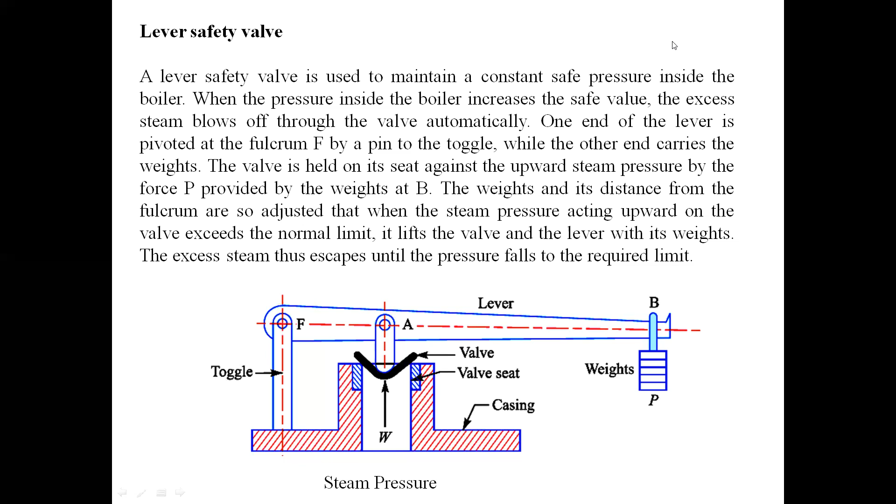Now here we are interested in the lever. The lever has three important points. At A, there is a load W. At B, there is a counter effort P. And at F, there is a fulcrum point. So, one simple statement of the problem.

A lever safety valve is 70 mm in diameter, and it is to be designed for the boiler blow off pressure of 1 Newton per mm square gauge. There is a safety valve having 70 mm diameter, designed for boiler blow off pressure of 1 Newton per mm square. That means if the pressure inside the boiler goes beyond 1 Newton per mm square, the valve is expected to get lifted off and there is a blow off of the steam. Design a suitable mild steel lever of cross section B equal to 4t using the following permissible stresses.

Tensile stress 70 megapascal, shear stress 50 megapascal, bearing pressure intensity of 25 Newton per mm square is given. The pin is also made from mild steel, and the distance from fulcrum to the weight of the lever is 880 mm, and the distance from the fulcrum pin to the pin connected to the valve is 80 mm.

By understanding all this, it is well understood from the figure. In this figure, it is given that there is a pressure of 1 Newton per mm square inside the valve. So on the valve seat, there is a pressure of 1 Newton per mm square, with valve diameter as 70 mm.

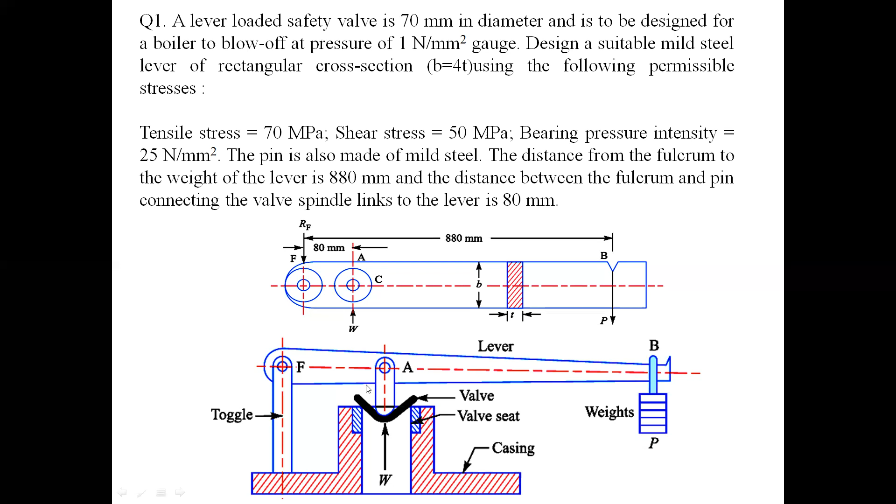Let's look at the given data. There is a diameter D of the valve given. There is a pressure P, steam pressure of 1 Newton per mm square. There are available stresses given, and the stresses are...

Now, looking at the bottom side of our figure, there is a pressure P acting on that diameter D. Because of that, W is created. That means pressure P is equal to load upon area of this valve. So it's a pressure, that's why pressure equals force upon area.

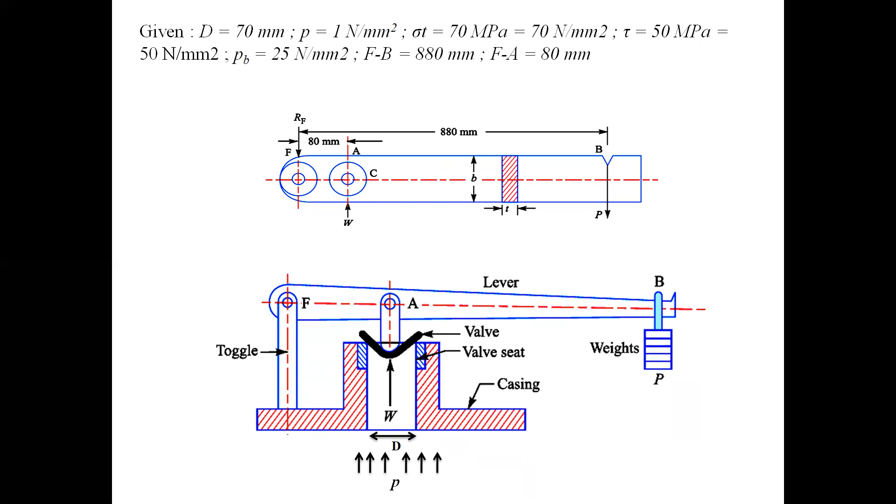Force is here, W, and diameter D. Pi by 4 capital D square is the area. So from that we can get the value of W. Try to get that.

Now here, W is the load and P is the pressure. Our pressure is equal to force divided by area. So W is equal to pi by 4 D square into P, which gives the amount of load at the point of application of W.

So W is equal to pi by 4 into 70 square, where 70 is the given diameter and 1 is the pressure. So 3850 Newton is the load acting at W.

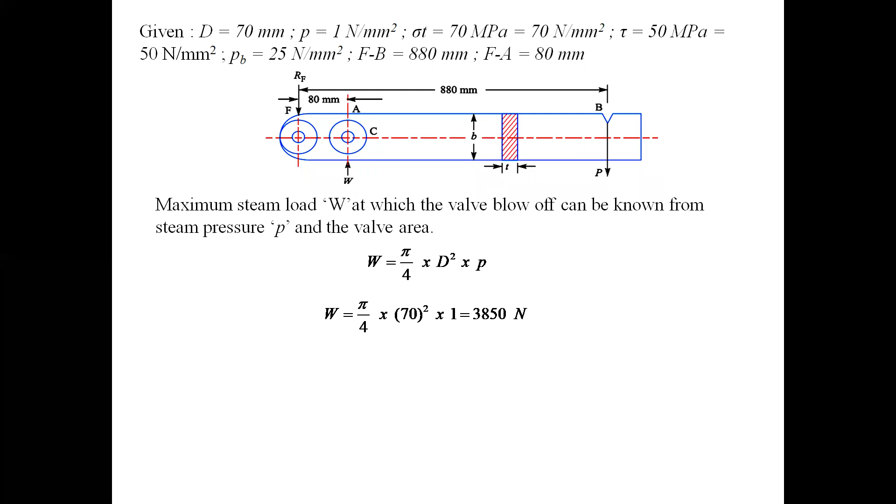The reaction at the fulcrum point we can find. When we take the reaction at the fulcrum point, we can get the moment created at the fulcrum point. So take moment about the fulcrum point so that we can have the equation between effort and load.

If I take reaction at the fulcrum point, P is the effort multiplied by 880, the distance from the fulcrum point, which creates clockwise moment, whereas W, which is in the upward direction at W, creates anti-clockwise moment. W we know is 3850, which we just found out.

Multiply by 80. So it becomes P equal to 308 into 10 power 3 newtons, divided by 880. Then P equals 350 newtons.

So P, the effort at a distance of 880 from the fulcrum point, is just 350. Now you can see the W load is very high, 3850 Newton, whereas the effort required is very less. So to control the pressure inside that boiler, we need very less force compared to the load created because of the steam. That is the main application of our lever.

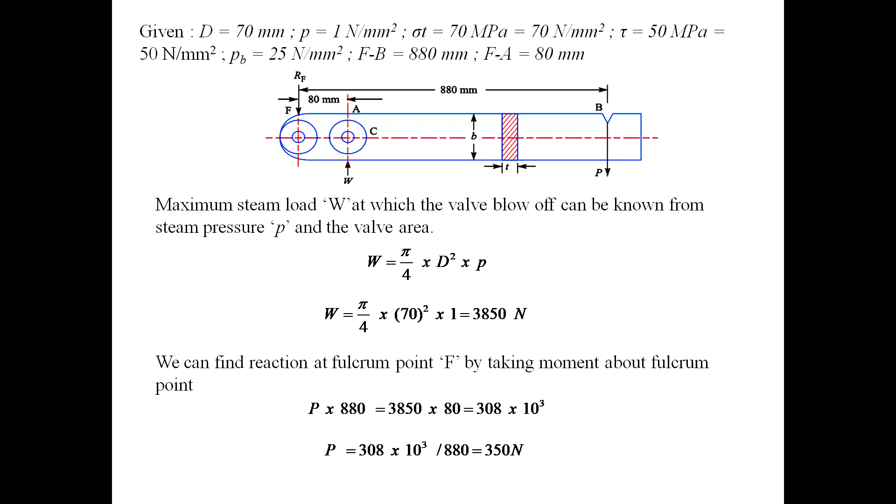Because of the lever, we can control the steam pressure using a very small quantity of force. So these are our values of forces at W and at P. These forces obviously we are using for the design.

Now, what is the reaction at the fulcrum point? The reaction at the fulcrum point we can find because there is W, which is load in the upward direction, and P, which is load in the downward direction. That's why the reaction at the fulcrum point is simply the subtraction of these two: 3850 minus 350. So 3500 Newton is the downward reaction at RF.

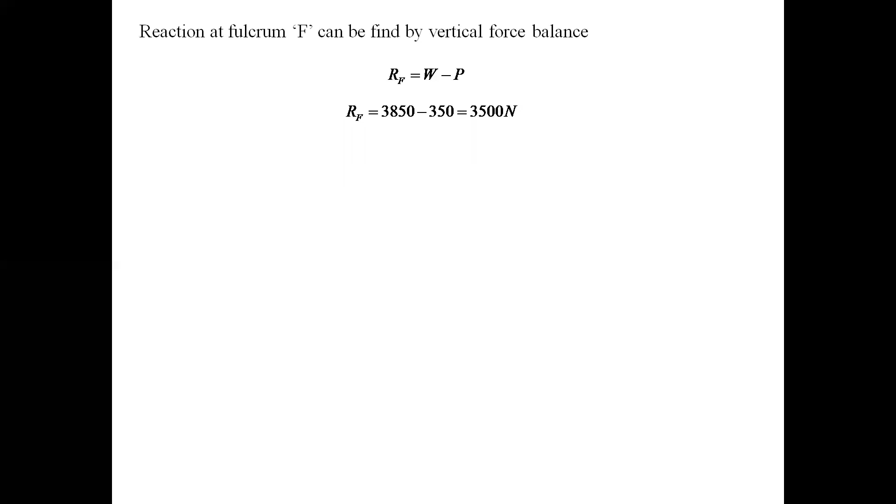Now let us go one by one through the pin design and the lever cross section. For that, first we'll go for the pin design. So there is a pin at A and there is a pin at the fulcrum point.

The pin at A has more diameter due to more force, which is equal to 3850 newtons. That's why we'll take the first design of pin. Design of pin: pin is a cylindrical member having diameter dp and length lp.

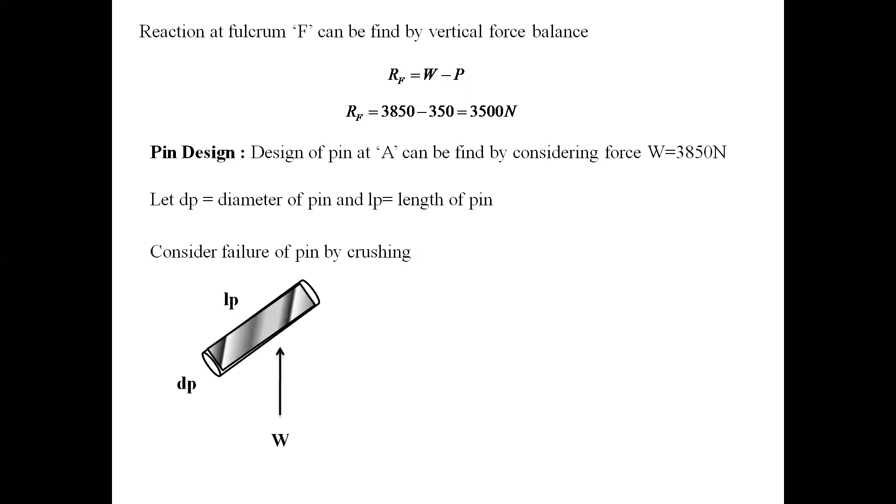First we check the pin for crushing, because it is a lever and there is a pin inside at point A, so there is a moment, and because of that there is crushing. When the W force acts on that, there is crushing. So the crushing area of the pin is generally diameter into length, dp into lp.

Consider the standard relationship that we generally take: length of the pin is equal to 1.25 times dp. That's why the area under crushing is equal to 1.25 dp square. So that area we know.

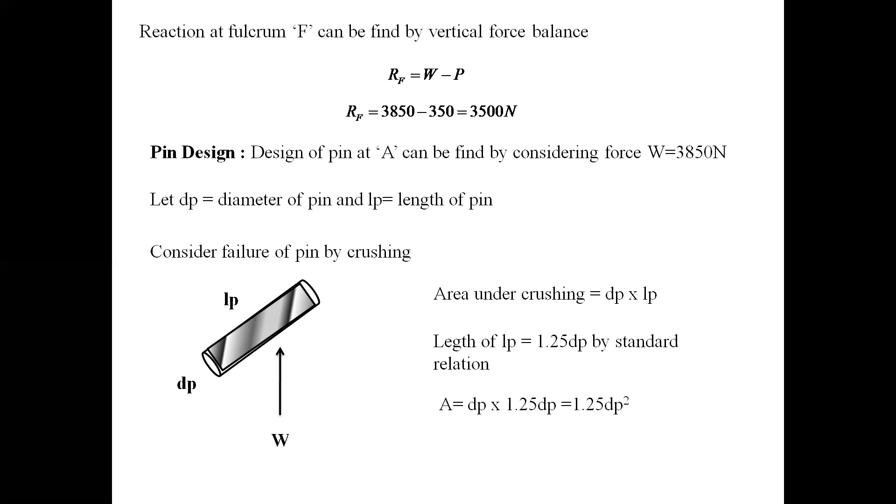If we take that area under crushing and put it in our crushing stress equation, given by our bearing pressure, bearing pressure is nothing but crushing stress. So bearing pressure is equal to load upon area.

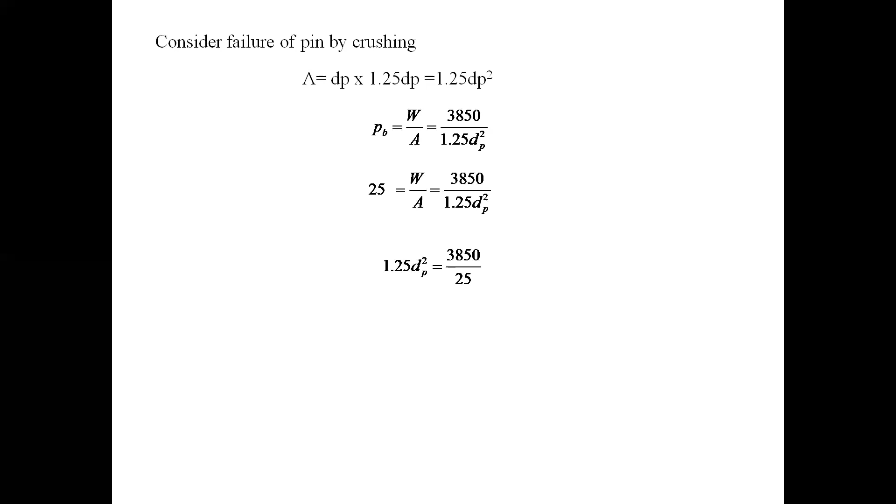Load at point A is 3850, and we just found the area is equal to 1.25 dp square. So if we put the bearing pressure value, given as 25, bearing pressure equals load upon area. From this we can easily find dp.

dp is equal to 11.1 mm, or we can round off to 12 mm. If we know dp, we can find the length of the pin, which is equal to 15 mm.

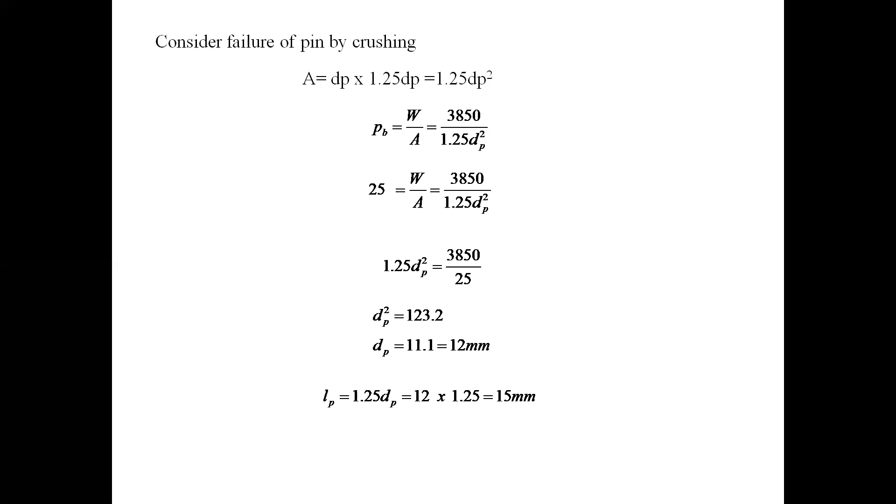This completes the failure check of the pin at point A, directly above the load W. There may also be a chance of failure in another way, like this. We already know dp is equal to 12 mm and lp is equal to 15 mm. Shear stress in the pin is equal to force divided by area.

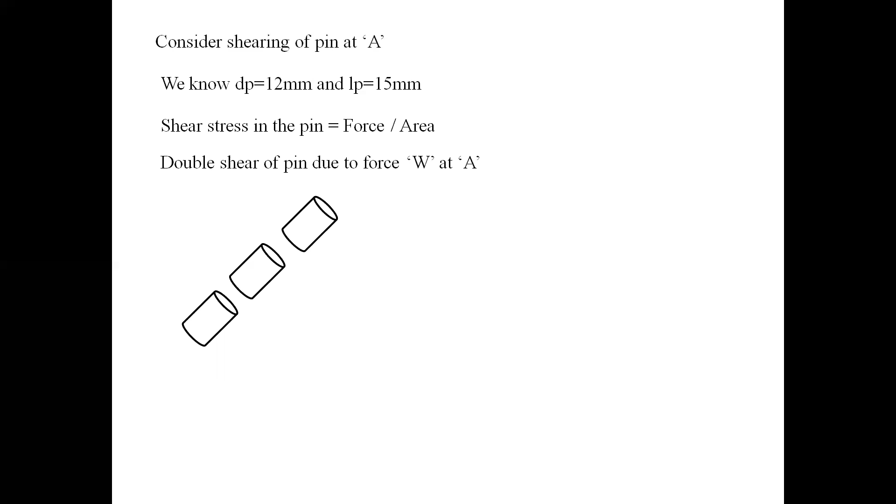So there is a double shear here, so twice failure can be possible. That's why our shear stress is equal to load upon area. Load is 3850 and twice shear means 2 into pi by 4 dp square. We already know dp is equal to 12 mm, so 2 into pi by 4, 12 square, so it comes out 17.02 megapascal.

So induced stress tau is equal to 17.02 megapascal. This induced stress by our known dimensions, which comes out from the crushing stress, is 17.02 megapascal. That means from the diameter 12 mm and length 15 mm, we got only 17 megapascal stress induced.

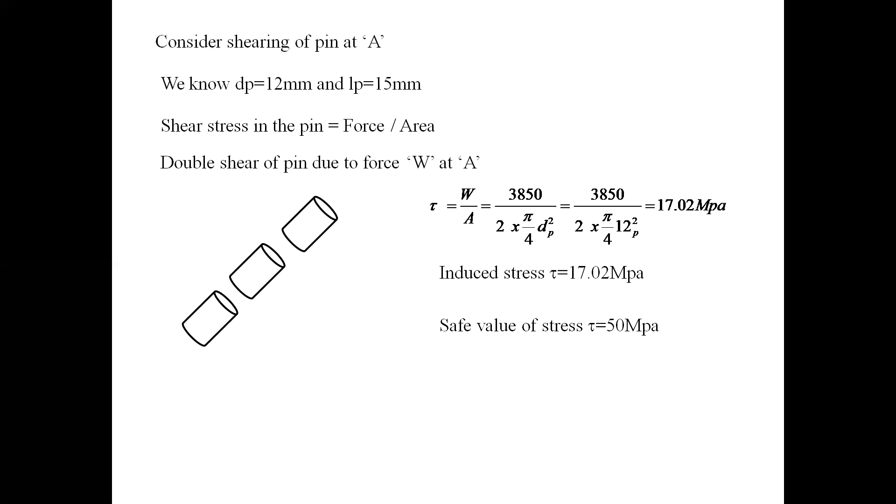But the safe value is very high, so that means our dimensions which come out from the crushing are very safe. The safe value of stress 50 megapascal is greater than the induced stress 17 megapascal. Design pin diameter is safe.

Same diameter of pin is used at F. One more thing is there: this pin is obviously subjected to wear. That's why a 2 mm thick copper or brass or gunmetal bush is also used to reduce wear at the pin position. Our diameter of the pin is 12 mm.

If I use a 2 mm thick bush, then the diameter of the bush becomes 12 plus 4, so 16 mm. So there is a 16 mm external diameter bush, made from brass, gunmetal, or copper. These metals have the property of self lubrication.

That's why they reduce wear with this particular material as compared to others. So that's why we must use these bushes inside the lever, so that whenever we need maintenance, we can replace the bush. There is no need to replace the complete lever. That's why these bushes are kept inside the connection between pin and lever. So this completes our design of pin.

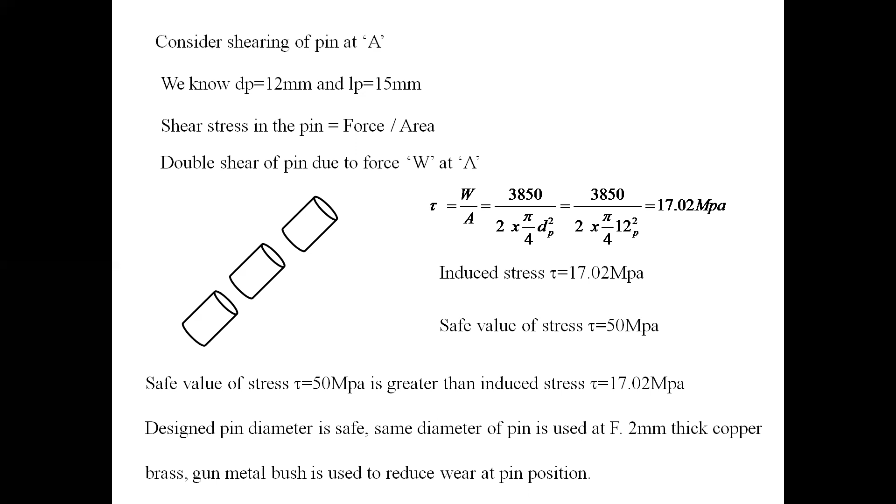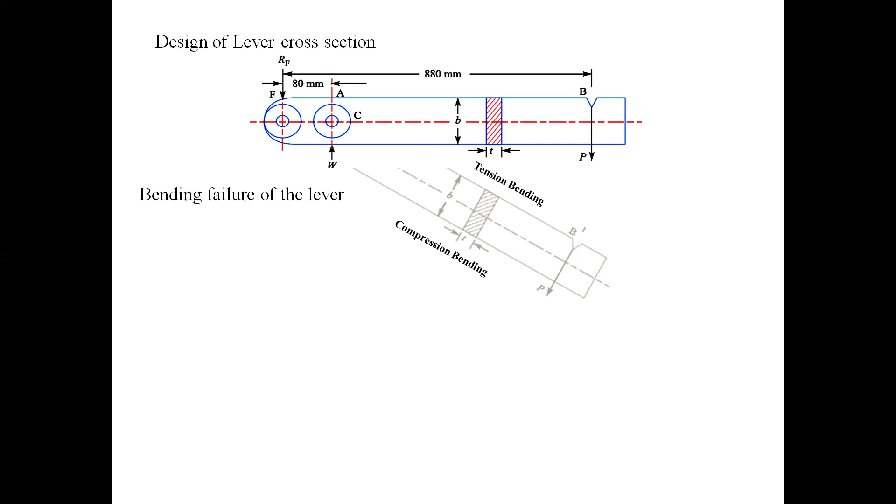So when we say bending, bending stress is equal to M by Z. The section modulus is tb square by 6. Look at that lever cross section, you'll find there is a base t and height b. So tb square by 6, and b is 4t as per the standard given. Already it is given in our problem that b is equal to 4t. So t into 4t square divided by 6, which becomes 16t cube by 6.

When we think about the moment, moment is equal to force multiplied by distance. The chances of maximum bending are up to point A. From A to F there is a direct support, that's why the bending is possible at point C, so at point C means the maximum bending moment we must take at point A.

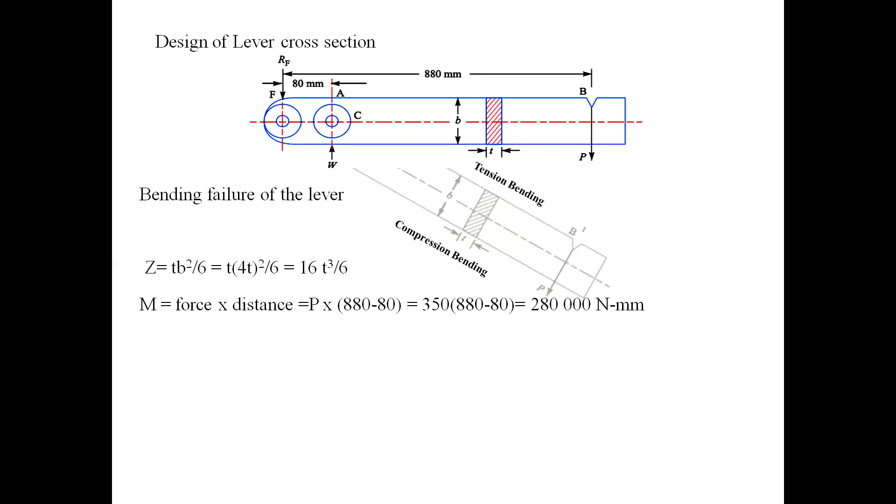So 350 is the force effort kept, or the load which is kept at B, so that's P multiplied by distance. Distance is 880 minus 80, that much distance is sufficient to create a bending moment. So we are going to design that cross section near point A. So 350 into 880 minus 80, the moment becomes 280 kilonewton mm.

If you put that bending stress in our equation, bending stress is equal to M by Z. Put the value of M and Z, and the bending stress given as the safe value 70. Since bending stress is tensile bending, tensile stress is 70 given. So 280 kilonewton mm divided by Z value 16t cube by 6. From that we can get the safe value of cross section t as 12 mm, and depth b equal to 4t, which obviously becomes 48 mm.

So by this way we can find the dimensions of our lever cross section as well as pin dimension by considering crushing and shearing, and lever cross section by considering bending failure. So this completes our design of safety lever.